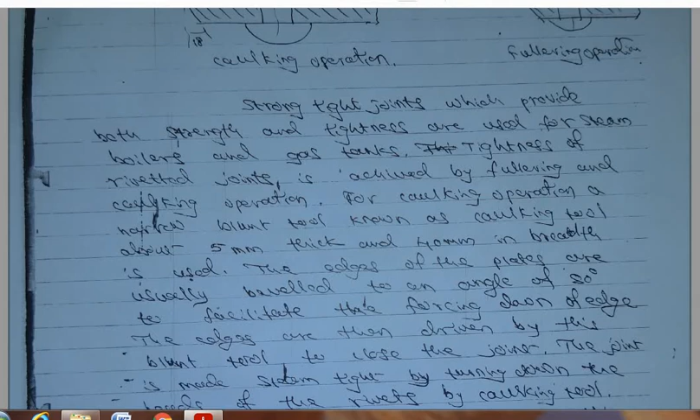Here, the edge of the plate is beveled to an angle of 80 degrees. This caulking tool has a thickness of 5 millimeters and a width of 40 millimeters. We hammer slightly from this side so that the plate is beveled down and moved down, making the joint sealed and leak proof. Similarly, we give a small force over here so the rivet head is blunted down, avoiding leakage of gases or steam from this side. This is the process of making the joint leak proof.

One care must be taken here, since the caulking tool is very narrow. If I apply a little larger force, there is a chance this edge may get damaged, and instead of closing the joint, we may open it. So care must be taken to see that the force applied is optimum.

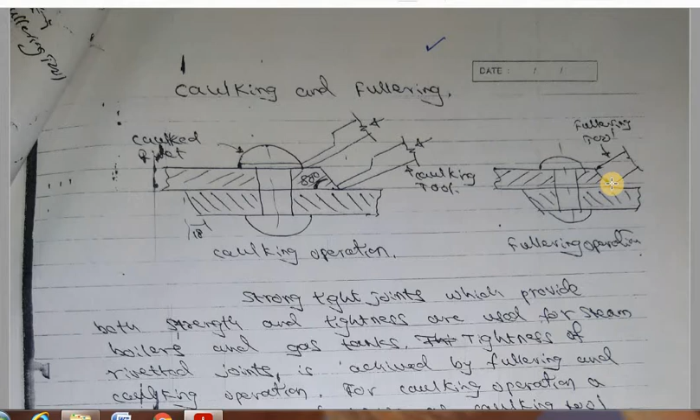This side I have the fullering tool. This tool has a thickness the same as the thickness of the plate, as you can see here. By means of this, if I hammer from this side, there is no danger that the plate will break down. Instead, the plate will move down because of the beveled side and get sealed at that particular point. So caulking and fullering are the two processes used for making the joint leak proof.

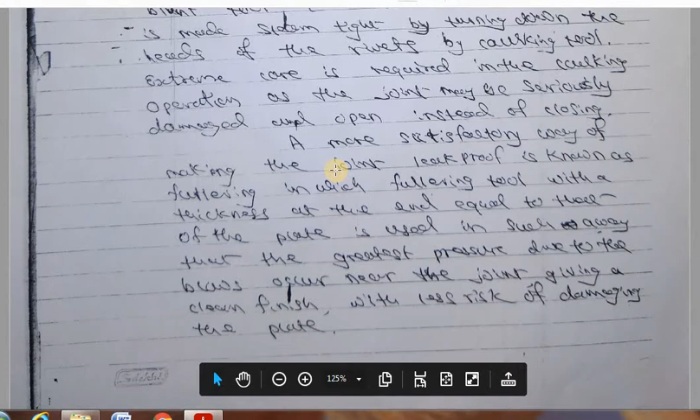Among these two, fullering is the more satisfactory way of making the joint leak proof, rather than the caulking operation. This theoretical part is very important, and there may be a question in the report asking you to explain caulking and fullering operations.

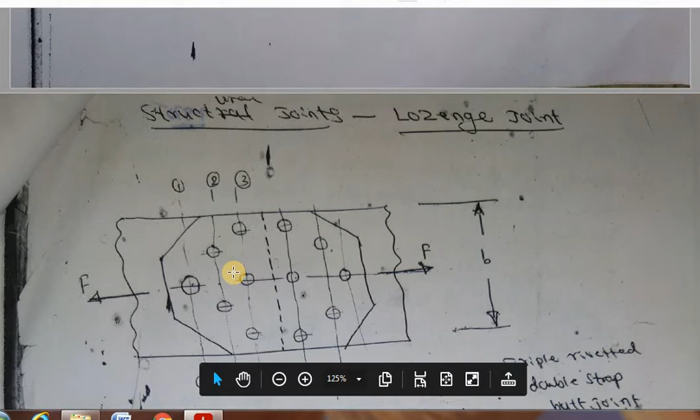Next I go for another important type of design. One aspect of design is already completed: design of a general structural joint using rivets, and design of the boiler joint. Now I will go for a structural joint, in particular called a Lozenge joint. There is a particular word called Lozenge joint, otherwise called a structural joint, otherwise also called a tie bar joint. It is used for roof work, bridge work, or girders. In such cases we can go for using this type of joint.

This is nothing but a simple double cover butt joint. One plate is here, another plate is here, joined at this particular point. Here I am using a top cover plate and a bottom cover plate, with a triple row here - 1, 2, 3 - or more rows can be added.

This is the plan view of the structural joint, the tie bar joint, or lozenge joint. The force is applied over here, and this has a definite width B. In our earlier type of joint, I did not fix the width of the plate because that line was a wavy line, meaning lengthwise and widthwise it could be anything.

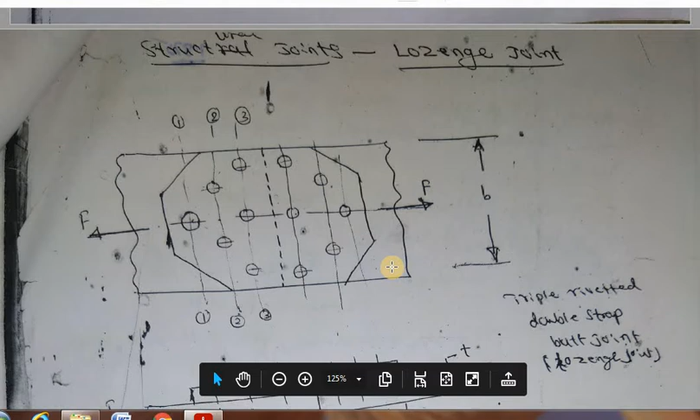Because of that, resistances were calculated per pitch length. Now here, since there is a definite width of the plate, we can calculate resistance across the entire width. You can see the particular arrangement - this is the parent plate shown by the dotted line, one parent plate on this side and one on this side. Both are butting at this particular point, and the butt is shown here - this is the butting edge.

On this side of the plate, you can see the arrangement of the rivets. Row 1 has only one rivet. Row 2 has two rivets, 1 and 2. Row 3 has three rivets, 1, 2, 3. This side is a mirror image of the rivets on the other side. So the arrangement moves like this, stays constant, and goes down like this - it looks like a diamond shape.

Therefore, this is what we call a diamond joint, otherwise called a diamond arrangement of the rivet joint. So let me go for designing this kind of joint, which is used for structural work, called a lozenge joint, or called a tie bar joint, or called a diamond joint.

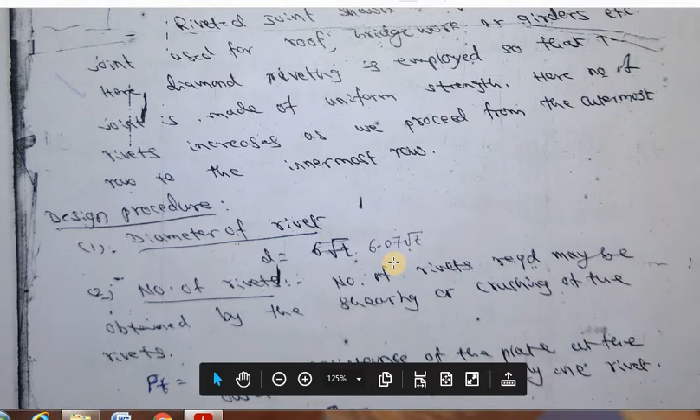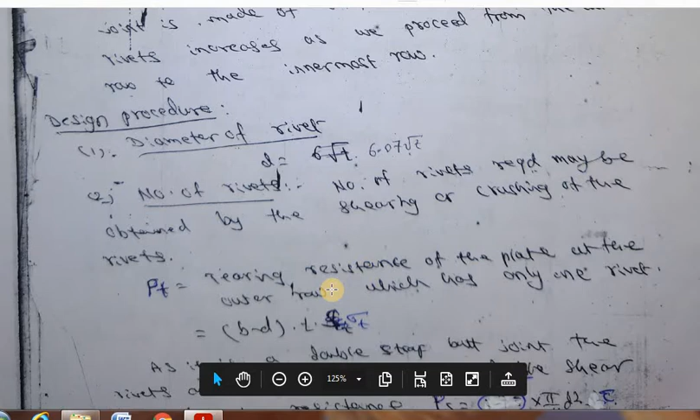The design procedure: the diameter of the rivet is 6.07 root T, same formula as used earlier. So the number of rivets required needs to be calculated. You can see the figure - there are a number of rivets here. As the width is definitely known, I should know how many rivets are being used for the entire joint.

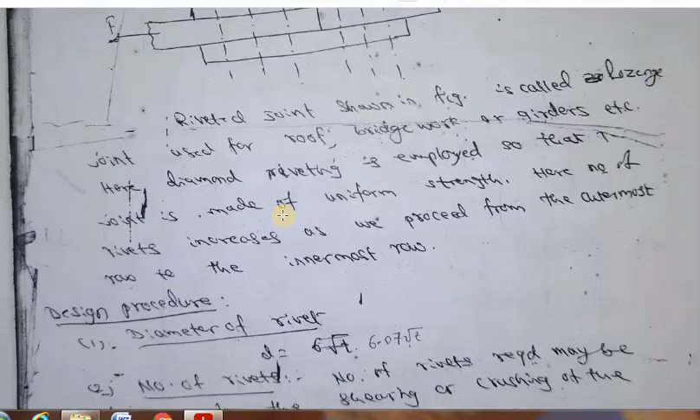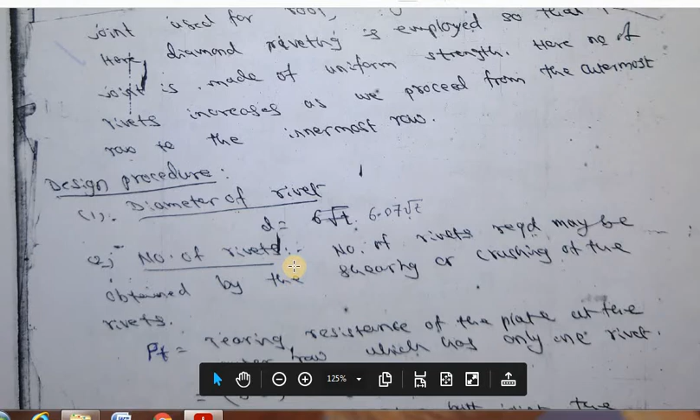The number of rivets is calculated based on first calculating the tearing resistance of the plate at the outer row, which has only one rivet: B minus D, T into sigma T. In this outer row, the first row, there is only one rivet. The entire width of the plate from here to here is B. So B minus D - one hole is drilled here for a rivet - B minus D is the remaining length of the plate, into thickness T, giving the area. So B minus D into T into sigma T is the tearing resistance of the plate in the first row.

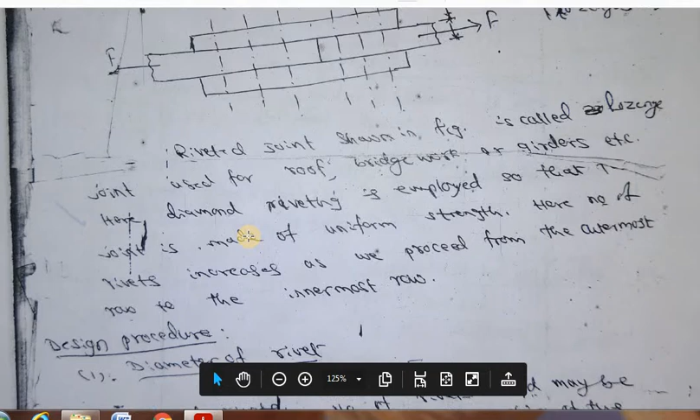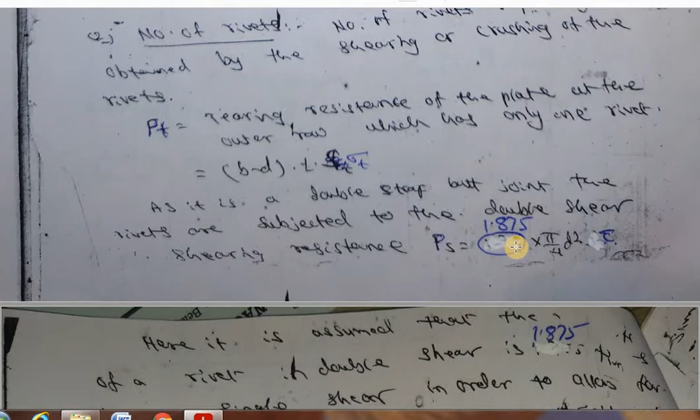If you see the rivet over here, both the cover plates are used, so the rivet in this row is under double shear - all rivets are under double shear. So I calculate the shearing resistance of the rivets: PS equals 1.875 times pi by 4 d square into tau, since there is only one rivet in the outer row, with 1.875 as the strength factor.

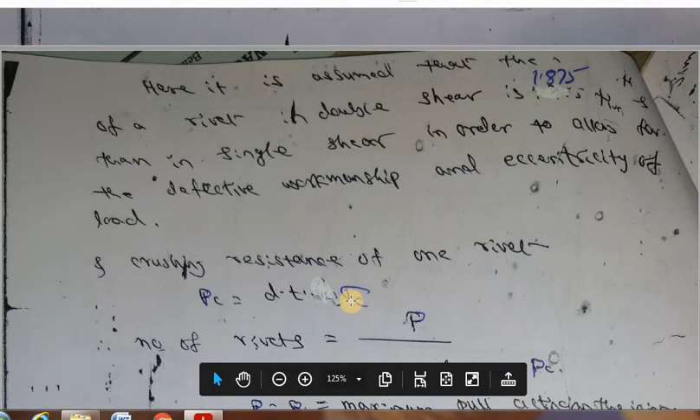Then we calculate the crushing resistance of the one rivet in the first row: D into T into sigma C. Then the number of rivets is calculated as P, the total force applied on the entire solid plate, divided by the least of PS or PC. Since the total force applied P equals PT, the maximum pull acting on the joint, we can say the number of rivets is PT divided by the least strength of PS or PC.

One has to remember these equations because these equations are not available in the design data book.

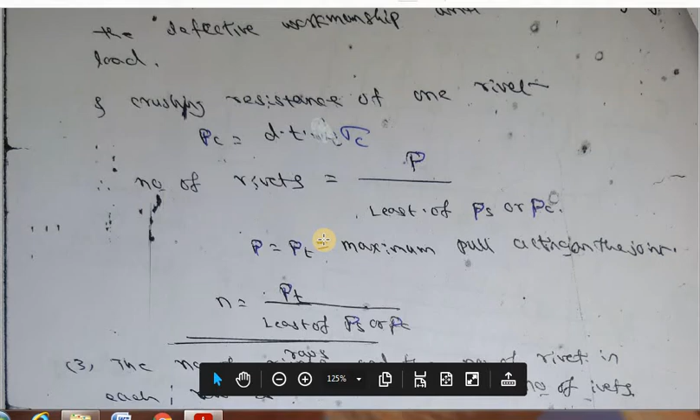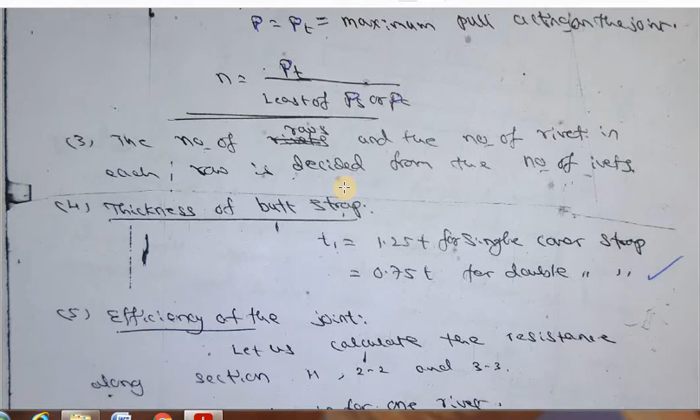Next we decide the number of rows. That depends on the number of rivets and how you arrange the rivets. Based on that, the number of rows is decided.

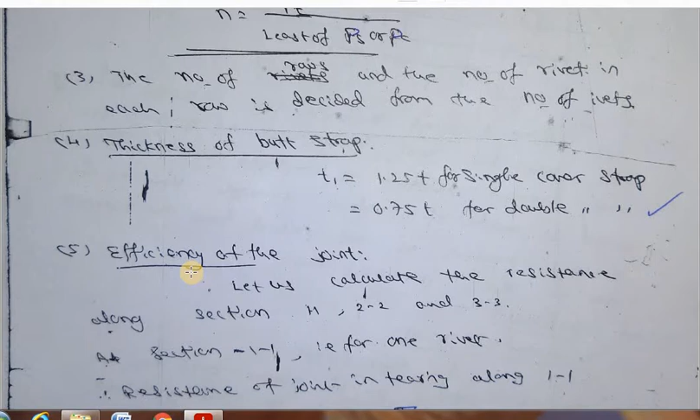Thickness of the butt strap: T1 is 1.25T for single cover, 0.75T for double cover. For efficiency of the joint, students have to be very careful in the calculation.

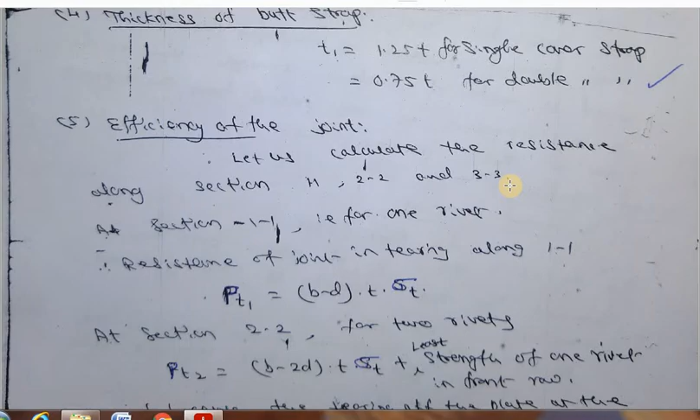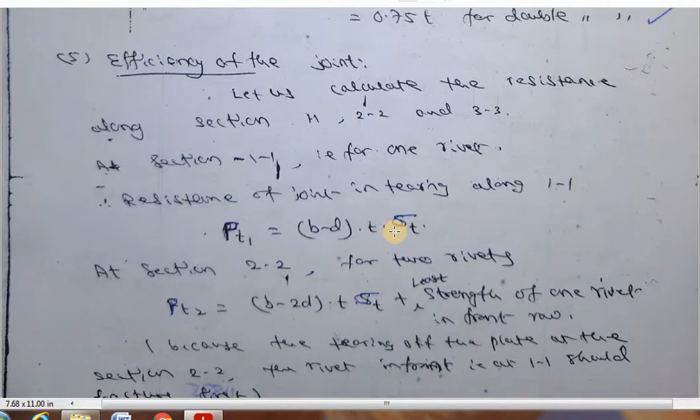So therefore, resistance along rows 11, 22 and 33. At section 11, that is for one rivet, there is only one rivet. Resistance of joint in tearing along 11, PT1, which I will name as B minus D, T into sigma T. At section 22, for two rivets, PT2 equals B minus 2 times D, T into sigma T.

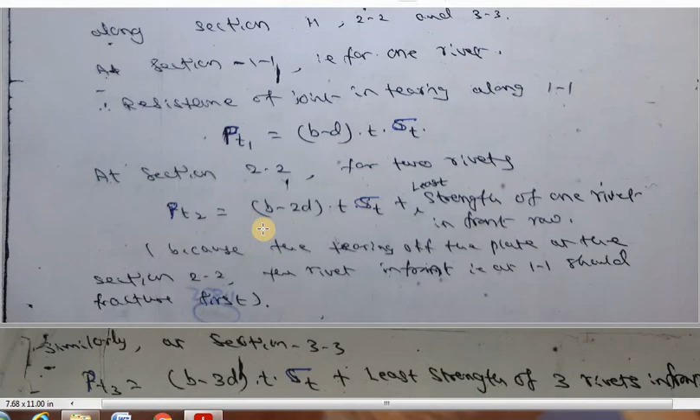Why is 2D there in the second row? Because you have two number of rivets. So the second row has two rivets, and this hole diameter plus this hole diameter is to be subtracted from the entire width, giving B minus 2D.

Plus the least strength of one rivet in the first front row, because if you are calculating tearing of the second row, the number one rivet in the first row might have already failed. Therefore, this strength is to be added to this strength.

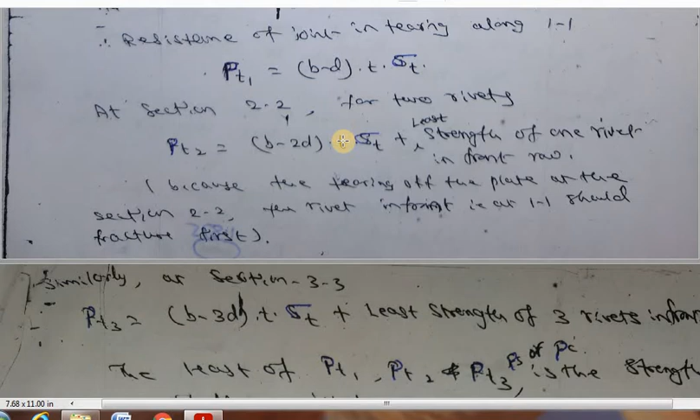Similarly, along section 3, B minus 3D, because 3 rivets are there, T into sigma T, plus the least strength of 3 rivets in the front row. So all the rivets in the first row and second row might have failed, and that strength is to be added to the tearing resistance along the third row.

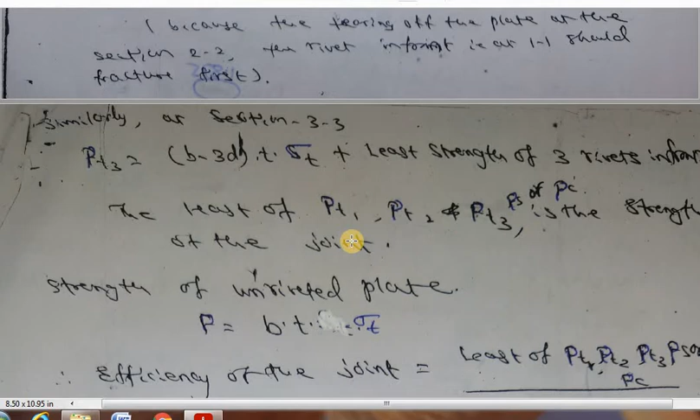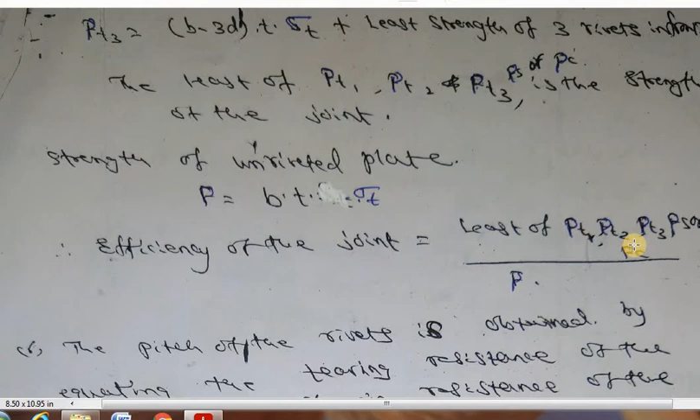Therefore, the least strength, PT1, PT2, PT3, PS or PC, is the strength of the joint. Strength of the unriveted or solid plate is B into T into sigma T. Therefore, efficiency of the joint is the least strength among PT1, PT2, PT3, PS or PC, divided by that solid plate strength. That is the efficiency of the joint.

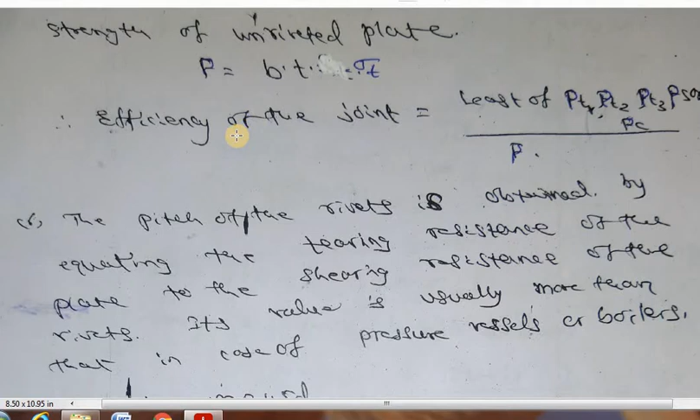This pitch is normally going to be much higher, but the only thing is, if leakages are there, you need not worry, as that can be compensated.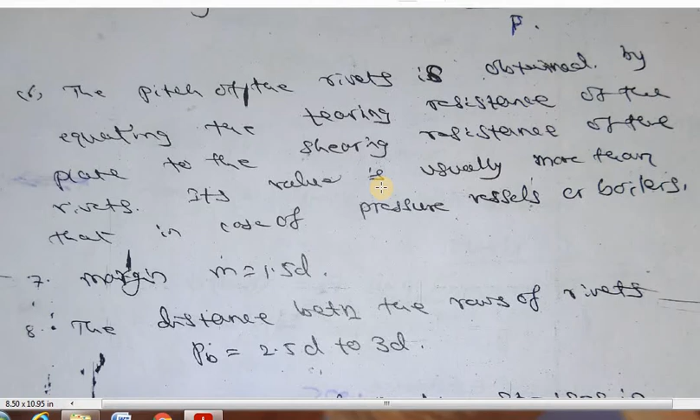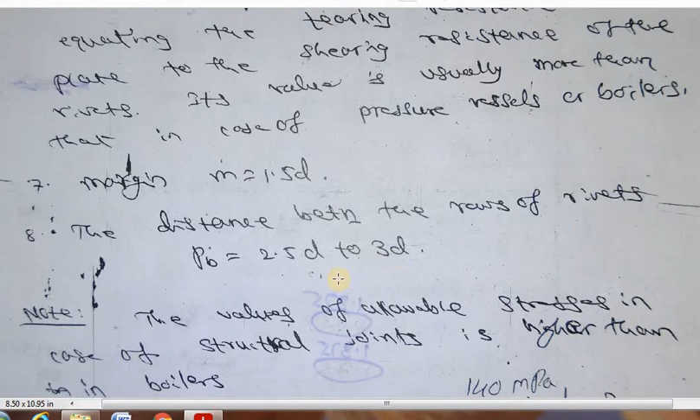Next step: pitch of the rivets is obtained by equating tearing resistance of the plate to shearing resistance for pitch length. Margin is 1.5D, though you can increase the margin slightly. The distance between rows of rivets is 2.5D to 3D, which is the back pitch, otherwise called transverse pitch.

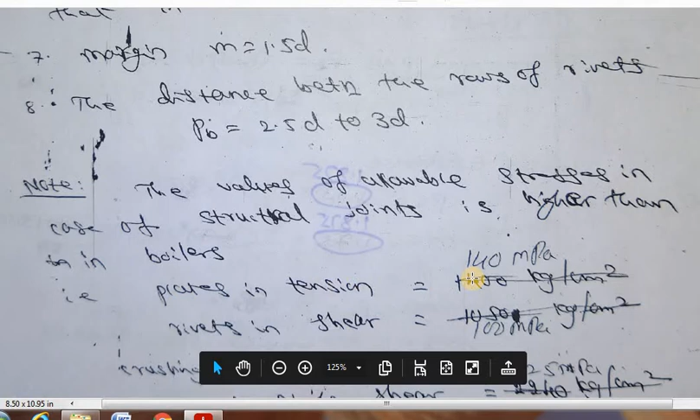One has to note that the permissible or allowable stress values in structural joints are higher than in boiler joints. Normally, plates in tension have 140 megapascal, rivets in shear have 100 megapascal, and for crushing of rivets and plates, single shear has 225, double shear has 280. These permissible stress values are much higher compared to earlier type of joints.

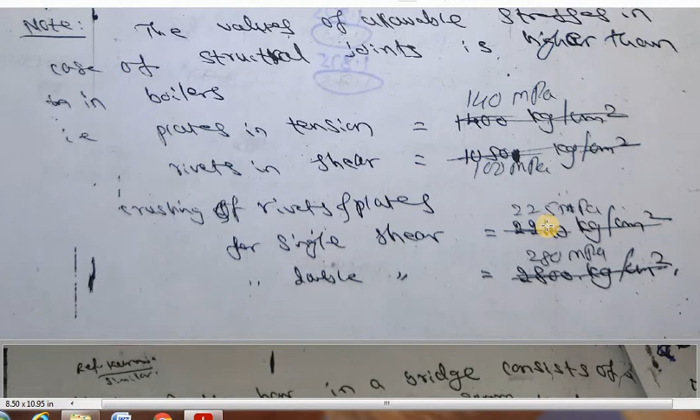I will take up the same thing with respect to an example. A tie bar joint, students can see, whenever you have a tie bar joint used in bridge work or roof work, this procedure is required to be adopted, not the earlier procedure.

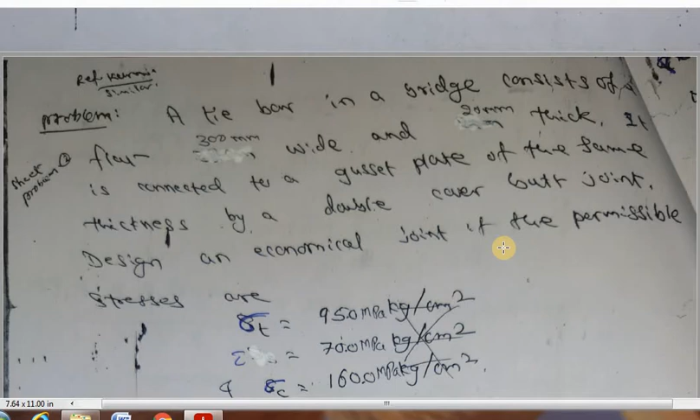Tie bar in a bridge consists of a flat 300 millimeter wide and 20 millimeter thick. It is connected to the gusset plate of the same thickness by a double cover butt joint. Design an economical joint if the permissible stresses are sigma T is 95 megapascal, shearing stress 70 megapascal, and sigma C crushing stress is 160 megapascal. So all stress value quantities are given here.

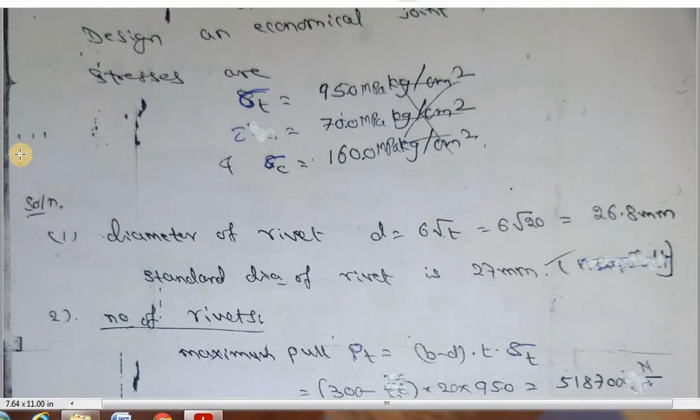Usual procedure, whatever you have done earlier, same procedure. Only thing, slight deviations wherever possible, I'll tell you also.

Diameter of the rivet, using Unwin's formula as 6 root T. So you have 26.8, so standard size is going to be 27. Number of rivets are to be calculated.

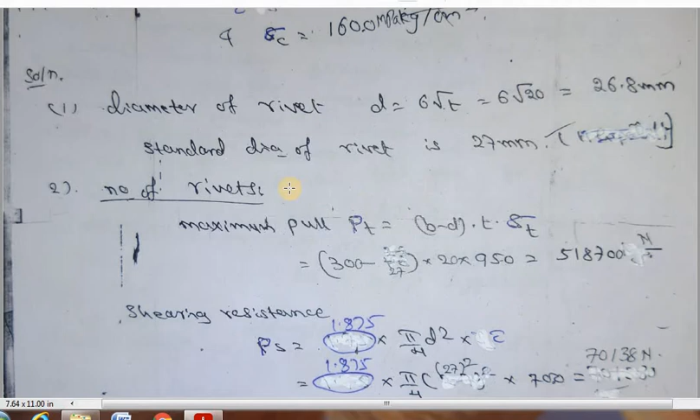For that, maximum pull PT, first I calculate in the first row, B minus D, T into sigma T. B is 300, that's given. Diameter of the rivet, you have calculated 27.

Thickness of plate is given, and 95 as sigma T value, so it will come as 518,700 Newton. Shearing resistance is 1.875 pi by 4 d square into tau, and putting all the values here, you get 70138 Newton. Crushing resistance D into T into sigma C, 27 into 20 into 160, so it is 86400 Newtons.

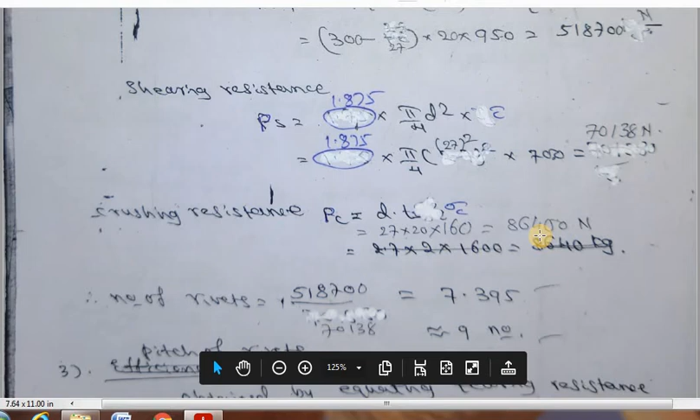So then among these two values, PS is going to be smaller. PS and PC, these two are the rivet failures - shearing failure of the rivet, crushing failure of the rivet. So this 70138 or 70.1 kilonewton is smaller than 86.4 kilonewton, so this is the least strength.

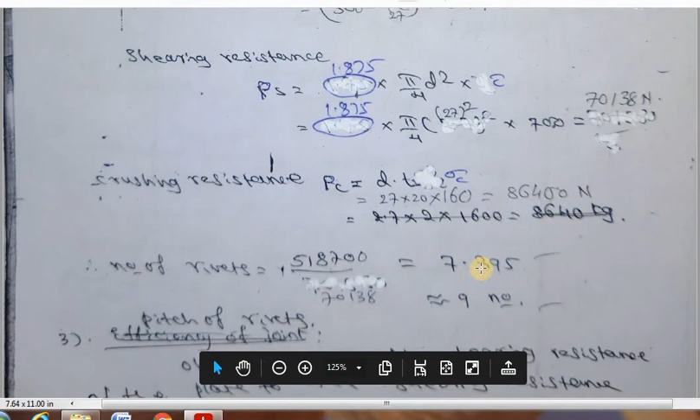So we divide the maximum force, whatever you apply here, by the least of these two. So that is 70138. Then I get 7.395, which I am rounding off to 9, because 7.39 cannot be rounded to 8 due to the exact number of rivets required to arrange in the diamond shape, which I will understand later.

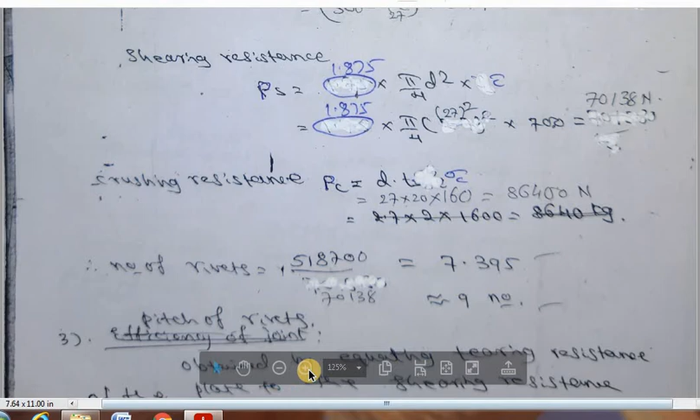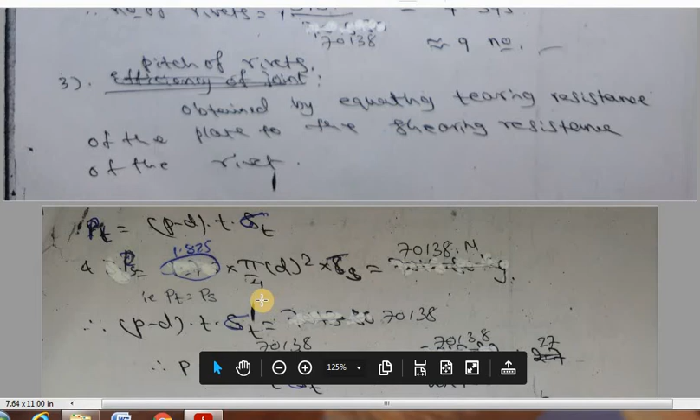Then I calculate pitch of the rivets obtained by equating tearing resistance of plate to shearing resistance of the rivet in the second row. So P minus D T into sigma T, shearing is 1.875 by 4 d square into tau - that value is already determined. So P minus Dt into sigma T I equate to the shearing resistance, then P value I get as 63.9, which I am rounding up to 64.

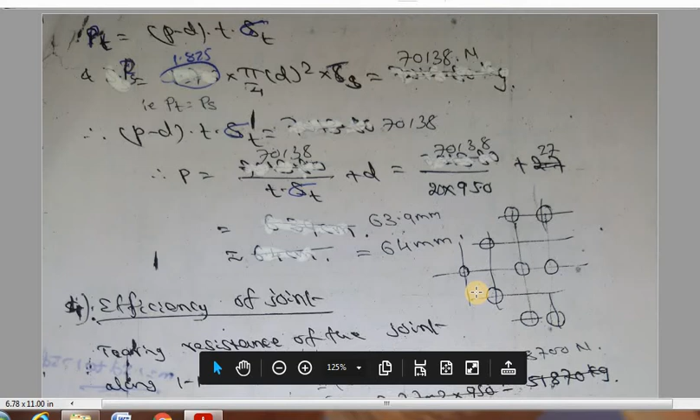So you can see here the arrangement I am showing as 9 number of rivets. So P is the distance between this rivet to this rivet in the same row, or distance from here to here in the same row, or from here to here in the same row. That is what we call pitch. So this pitch is 64.

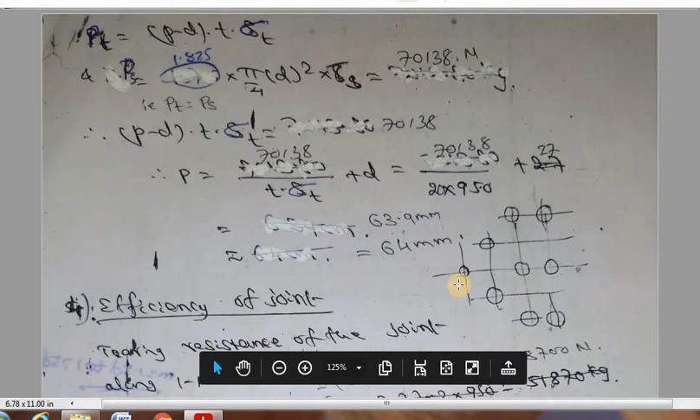So first you have got the number of rivets as 7.395, rounded up to 9. Why I am rounding up to 9 is I have to arrange the number of rivets in increasing order always. First row I should take always only one rivet. Second row I am increasing one rivet to two rivets. Third row I am increasing 2 to 3 rivets. So this is gradual increase.

Outer row I have 1, inner row I have increased to 2, inner row I have increased to 3. After this step, if not possible, you can retain the same in the next row. So up to third row, how many rivets I got now? 6, up to third row. But I have anything more than 7.

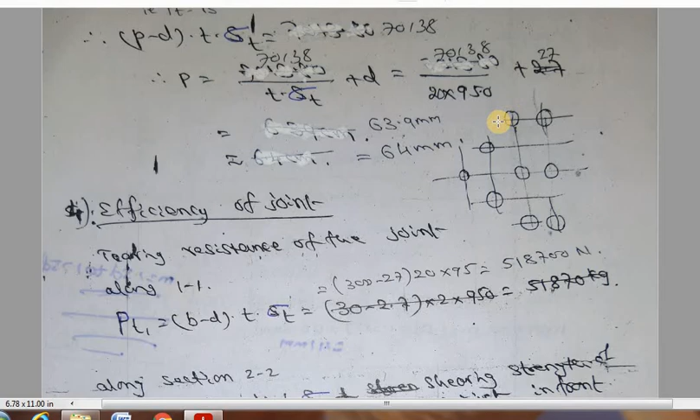So 2 number of rivets I cannot put. At least I have to keep the same number as the previous. If I keep the same number as previous, 3, how many does it become now? Totally 9. So 7.39 number of rivets which we have calculated has to be made as 9 number of rivets to accommodate this diamond arrangement shape.

This row, fourth row, also you have to increase to 4 - 4 number of rivets you have to keep, same as this. If I keep 4 number of rivets it's better because you are following the diamond configuration, but I am increasing 1 number of rivets unnecessarily. Therefore, I am retaining at least same as the third row number - 3 are there, so 3 number of rivets I am putting rather than increasing 1 more.

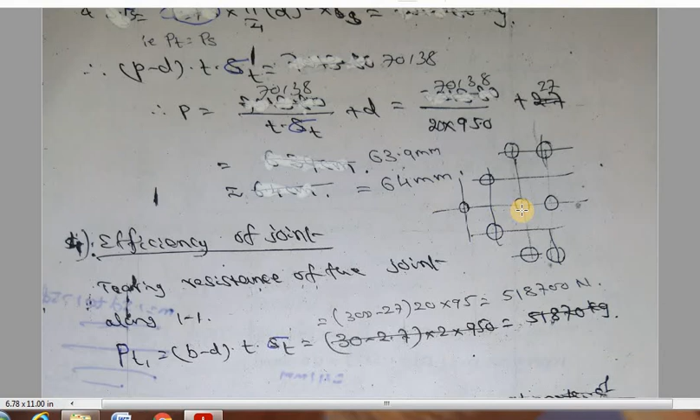So this is the arrangement of the rivet per plate. On this side plate, we have also the same type of arrangement. So then I go for calculation of the efficiency, tearing resistance of the joint. So these efficiency calculations are based on this configuration.

First row you will have only 1 number of rivet, B minus D T into sigma T. So B minus D T into sigma T value I have put here is 518,700.

Along section 2.2, PT2 is here. There are 2 number of rivets, so you are going to subtract B minus 2D T into sigma T.

If you want to have the plate failure along this row, this rivet might have failed already, either in shearing or crushing. Shearing failure of one rivet is smaller compared to crushing, therefore I have to add that shearing resistance to this. Then only the plate can fail over here because this has upward resistance. Therefore, I am giving you shearing strength of one rivet in the front row.

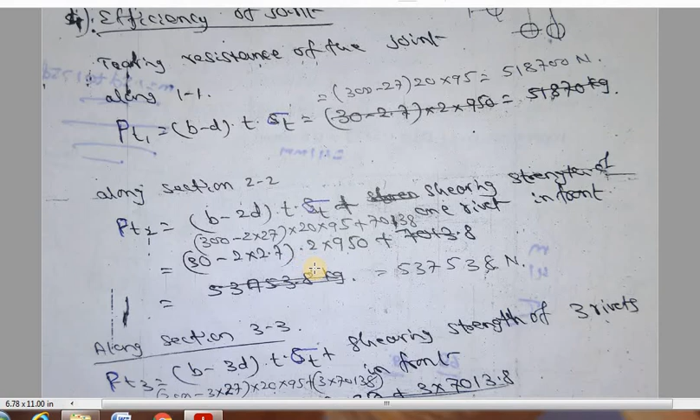This is already calculated, so these values I am putting here. So I will get 537538 newtons. Along section 3.3, PT3 is B minus 3D because there are 3 number of rivets, T

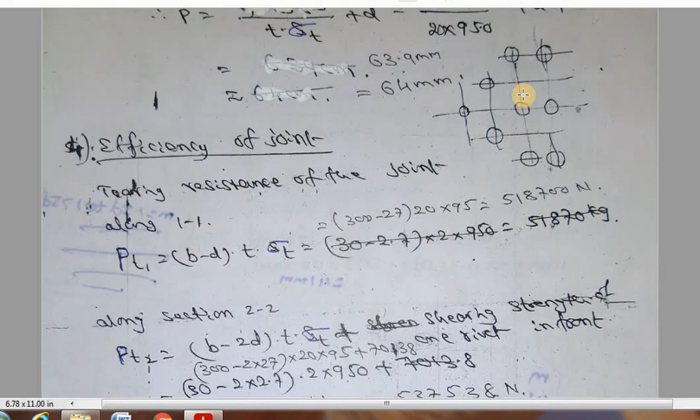and sigma T plus shearing strength of the 3 rivets. So along row 3, this is B minus 3D because there are 3 holes, minus 3D. These 3 rivets might have failed earlier before I take up this particular strength over here. So 3 times the tensile strength, plus the shearing strength of the 3 rivets, that is the shearing failure. When I do that, you will get a total of 626514 newtons.

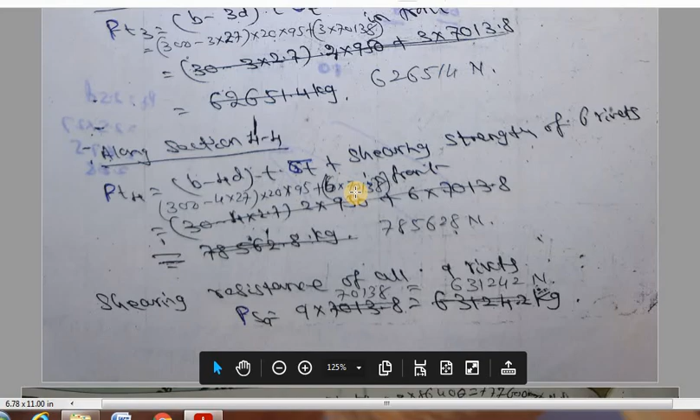Similar things at section 4.4, B minus 4D. There are 4 numbers, so 4D is around. Plus least strength is added to that.

So shearing resistance of all the 9 rivets, all 9 rivets can fail in double shear. So I am going to multiply by 9 into least strength of one rivet in shearing, that will give me this value.

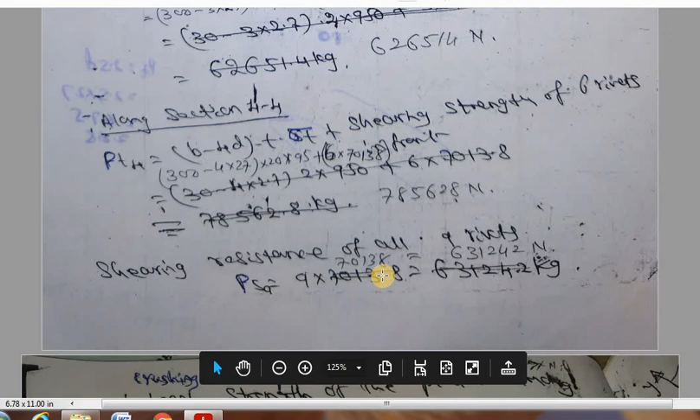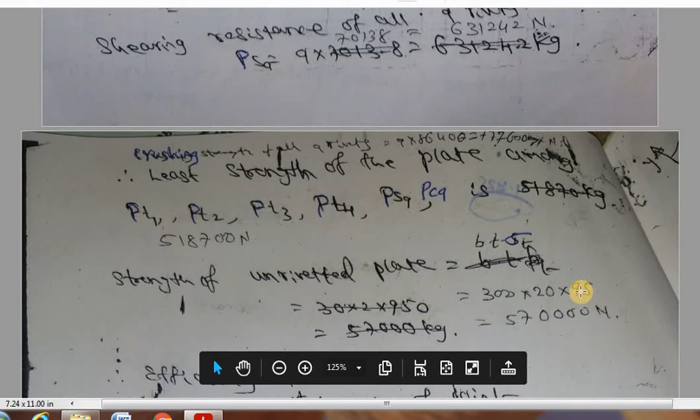Similarly crushing, so crushing least value I calculated here. Among all these PT1, PT2, PT3, PT4, PS9 and PC9, the least is going to be PT1, that's what I have here. Then the strength of unriveted plate is B into T into sigma T, those values are put here, which is 570000.

Then efficiency of the joint, as usual definition, is least strength of the joint divided by strength of the unriveted plate. Least joint happens to be PT1, that value I put here, strength of solid plate I put here, into 100, that gives 91.

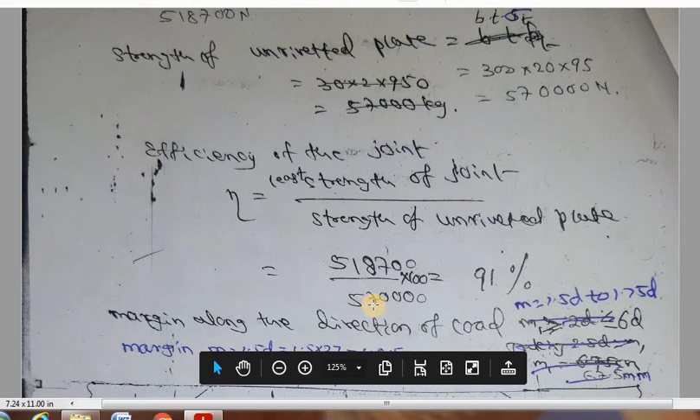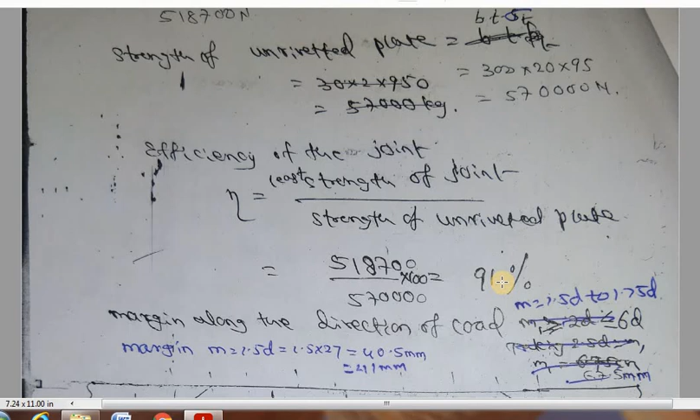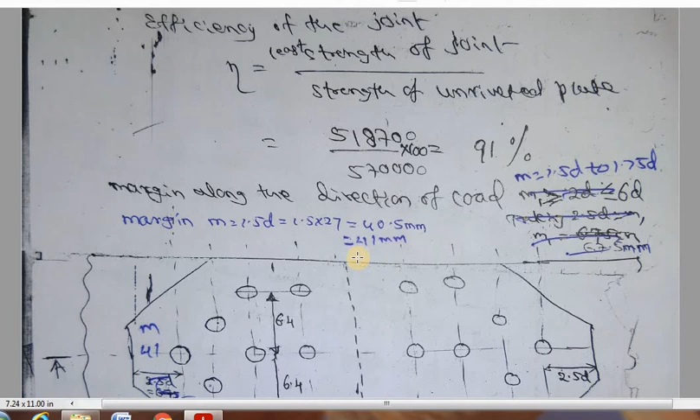Then we have the margin along the direction of the load, 1.5D to 1.75D. So if I take 1.5D, the value is going to be 41 millimeters. Then the distance between rows of rivets, PT is 2.5, they have taken here 2.5, which is 27, 68.

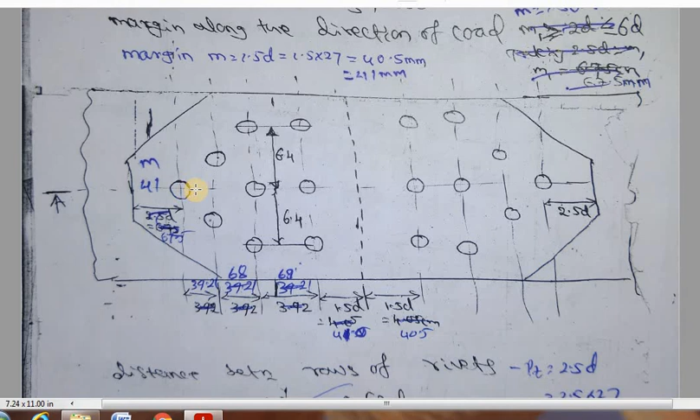So I'm giving you the figure here now. From this edge of the plate, this is the first row, margin 41. From here to here, this is transverse pitch, 68. From here to here, transverse pitch. From here to here is transverse pitch.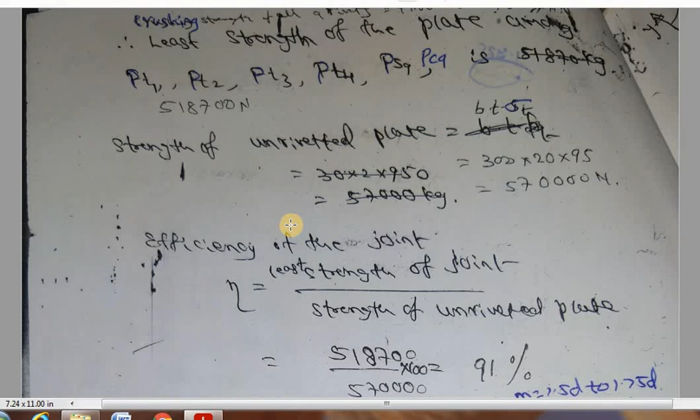The thickness of the plate is calculated as 0.75T, so 0.75T is 20, it's going to be 15 millimeters. Thickness of these two covers, this cover as well as this cover.

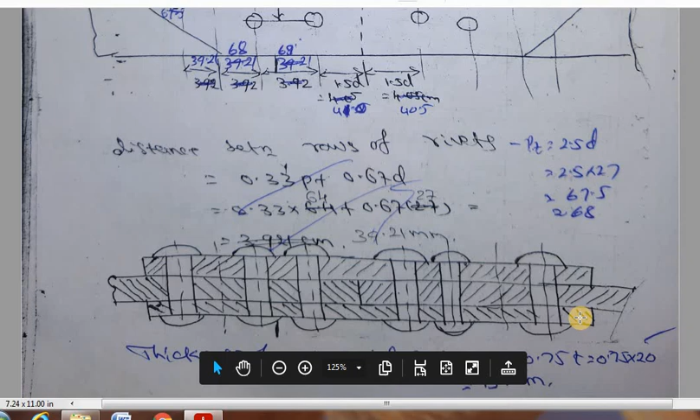So this is one particular joint which is called a tie bar joint or lozenge joint or structural joint used for roof work, otherwise called a diamond joint.

So there is a definite procedure which you are going to have, as I have already given to you. You are required to go through this procedure. Simple calculations, same equations are being used, only little steps are different at different times.